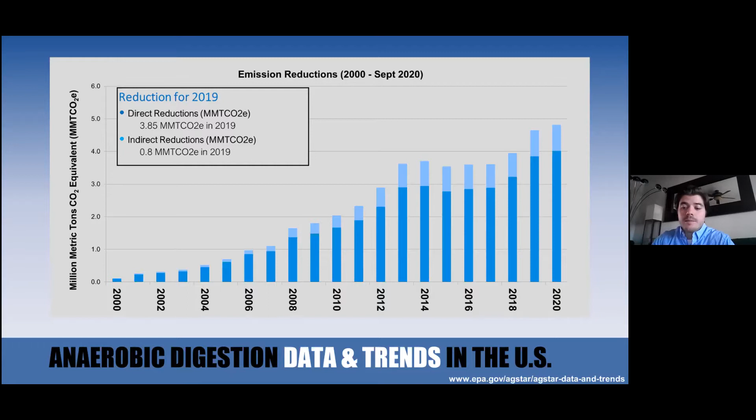What does that mean? Well, the EPA has a really great greenhouse gas equivalency calculator. Just Google that. You can find it and learn about how to equate different gases to what that means in relative terms. So essentially what 4.65 million metric tons of CO2 is equivalent to is over 1 million passenger cars taken off the road per year, as well as over 530,000 homes' energy use for 1 year. So biogas projects are having a big impact and helping to provide clean energy across the economy.

Continuing with the trends in the sector specific to renewable natural gas, there are a number of projects. I would say well over 90% of new biogas projects coming online in the US are renewable natural gas projects. And that's driven largely by the incentives from California and the Renewable Fuel Standard.

And this graphic here shows an example of a renewable natural gas project that's in a business model that is called a cluster project. Essentially, this is an example of California Bioenergy's Kern cluster in Kern County, California. Essentially, cluster projects take advantage of several farms in an area that each will build a digester, or there's a number of ways in which it can work, but in this example, each farm had a digester on their farm, connected through local distribution pipelines to a singular pipeline where the gas was cleaned and upgraded to pipeline quality gas, where it is injected into the natural gas pipeline and is then purchased downstream for use as vehicle fuel.

And this project in particular has 15, I think, maybe even up to 17 or 18 dairies that are participating in this one cluster, taking advantage of economies of scale to reduce the cost per farm of the biogas upgrading and make it more economically viable.

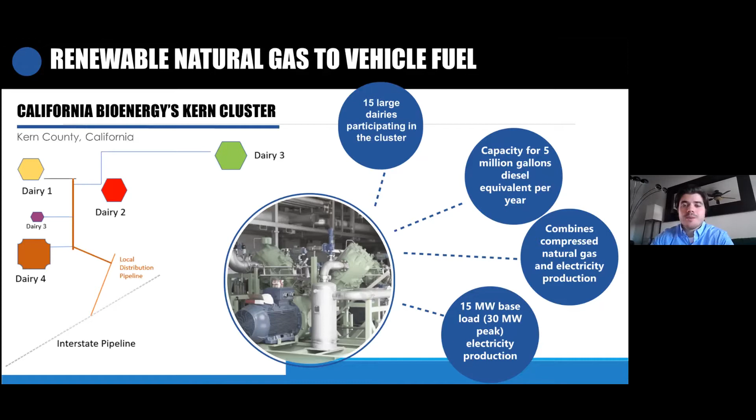This cluster is mainly injecting gas into the pipeline, but also has electricity production at some of the facilities, and is a really great example of what's happening not only in California, but across the country with livestock facilities, multiple coming together to form a cluster to reduce the cost and to increase the number of animals and manure, essentially, that can be used to produce large volumes of renewable natural gas. And Kevin will get into a lot more detail about some of the business models and the nitty-gritty of how those systems work.

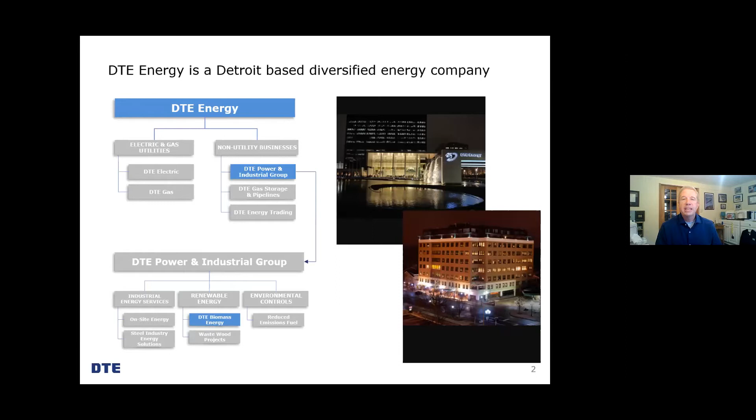But also DTE Energy has a portfolio of non-utility companies, of which its Power and Industrial Group is one of its 3 non-regulated business units. And then within this Power and Industrial Group is the company that I work for, which is DTE Biomass Energy. We are based out of Ann Arbor, Michigan. I'm calling you from my home here in Ann Arbor.

And we've been creating renewable energy from waste biogas sources for over 30 years. We currently operate about 24 biogas projects throughout 7 states. We have about 80 employees across the country, and our investment thesis is to own and operate these projects under sort of long-term investment practices. Our company has primarily and principally been taking biogas generated from the breakdown of trash at landfills across the country and converting it to renewable electricity.

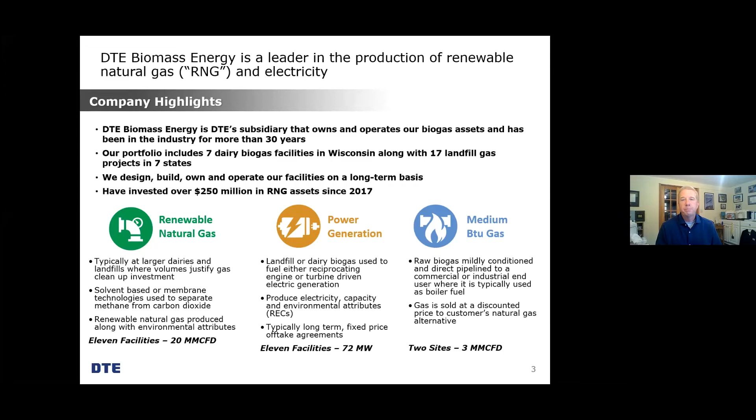However, as Nick pointed out, with the demand for RNG increasing over the past several years, we've expanded outside of landfill gas, and now we're primarily focused on developing projects using the biogas created by cow manure at dairy farms, and we convert that to transportation fuel. As I mentioned, our company has had a lot of experience on the landfill gas side, and we started up actually our first RNG project about 20 years ago at a landfill back in 2002. So currently our project portfolio includes 4 landfill gas-based projects.

And because of our experience on the landfill side, we were able to be one of the first to get into dairy-based RNG back in 2017 when we invested in our first set of dairy biogas to RNG projects in Wisconsin. We followed that up by completing construction on 4 additional facilities also in Wisconsin, bringing our total RNG assets to 11. And we've spent well over $250 million developing this space over the last several years.

We continue to see tremendous growth and opportunity here, especially in the dairy sector. And we have a directive by our senior leaders to continue to grow this business line, which we are doing. Our latest dairy RNG project is going to be in South Dakota, and we are planning to break ground probably within the next month or so.

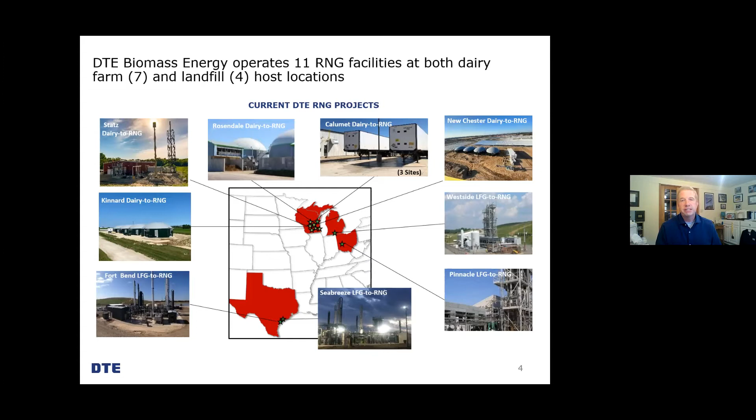So I'm going to go through these next 2 sections fairly quickly, as I want to dedicate most of the time to the benefits and the marketplace and the host farm characteristics surrounding RNG. But I thought maybe some of you might be thinking, well, what's all the attention and what's all this buzz around RNG, and what's creating that? Well, my personal opinion is it's a result of both macro and micro level factors coming into play.

On the macro side, RNG is a critical component of reducing greenhouse gas emissions. Decarbonization continues to gain momentum, and calls for the country to move to net zero emissions by 2050 have grown louder each passing day, and many stakeholders are making commitments to rapidly decarbonize. There are numerous drivers for decarbonization, whether that's advocacy or policy focus from both federal and state governments, as Nick has highlighted. There's commitments from utility companies to decarbonize, and similar commitments from companies as their environmental, social, and governance actions, better known as ESG, which is certainly being followed more and more by investors.

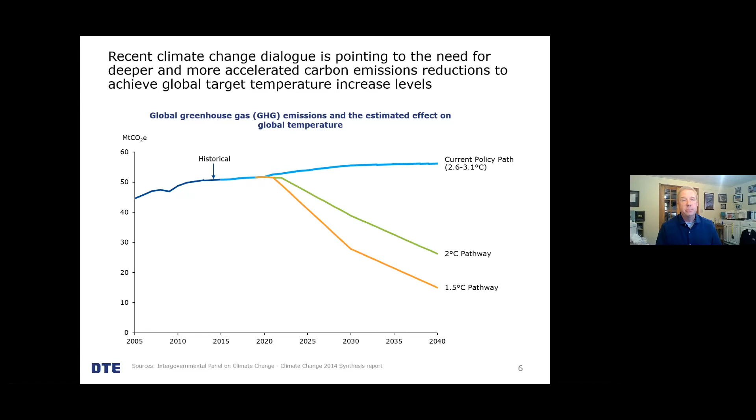And so negative emissions or offsets from these biosequestration projects, such as RNG, are going to play a critical role in achieving this significant decarbonization. So while global attention on fighting climate change has led to an increase in the popularity of RNG, so have more local efforts and attention. More and more dairy farmers are embracing their own role in this fight, and they're proactively looking for ways to improve the efficiency of their operations.

And RNG can turn what's traditionally been a cost to the farm, that being the collection and handling of manure, into a revenue stream. An RNG project not only benefits the farm itself, but also the local community around the farm, and it provides the farm another way to be a good neighbor in their community. And I'll get more into these benefits later in the presentation.

So now I thought I'd spend just a few minutes on the science part of the presentation. That is, how do we actually go about creating the RNG?

And so these next several slides will provide a high-level overview on how RNG is created at dairy farms and some detail into the actual science. And the idea of RNG is quite simple, right? What if we could capture methane that's a result of organic decay, and rather than allowing it to escape into the atmosphere, we can use it instead for a beneficial use.

So you'll see steps number 1 and 2 here in this slide of making RNG is to actually collect the manure at the farm, and then you deposit that into anaerobic vessels where that manure will sit and naturally decay, creating the biogas. Next, step number 3 is to collect this biogas and send it to a facility that refines the biogas, such as converting it into a product that looks just like fossil fuel-based natural gas. Again, now you've got RNG.

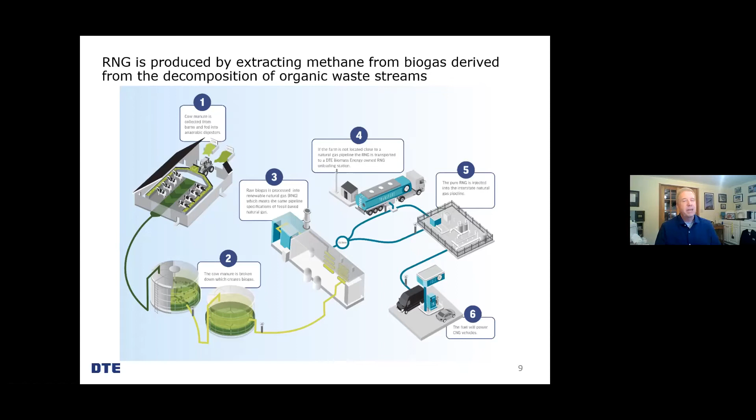I'm probably stating the obvious to this audience, but it goes without saying that manure management is certainly something that dairy farms need to pay a lot of attention to, given its potential impact to the environment, as well as its local community, and then just frankly, the large cost of handling this manure. So the dairy farm industry has been consolidating. Smaller farms and herds are being gobbled up and acquired by larger farms, which has led to farms with thousands and thousands of cows in one location. And these farms now need to address the large volume of manure that is coming in as part of that consolidation.

So traditionally, manure is collected by a farm. It's usually placed in large open lagoons, where it either breaks down and evaporates, or maybe some of it is taken out of the lagoon and land applied as a fertilizer. The collection of manure, however, in an anaerobically sealed container will capture that biogas that's created when that manure naturally decomposes.

And as you can see from this slide, the collection vessels can vary substantially. That top one, the covered lagoon, is just simply taking a tarp, if you will, and covering an existing lagoon. Or what we can do is construct containers that are specifically designed to optimize the collection of that biogas, either above ground or below ground. That middle one is kind of an underground swimming pool, if you will. You can see the top of it here in that photo.

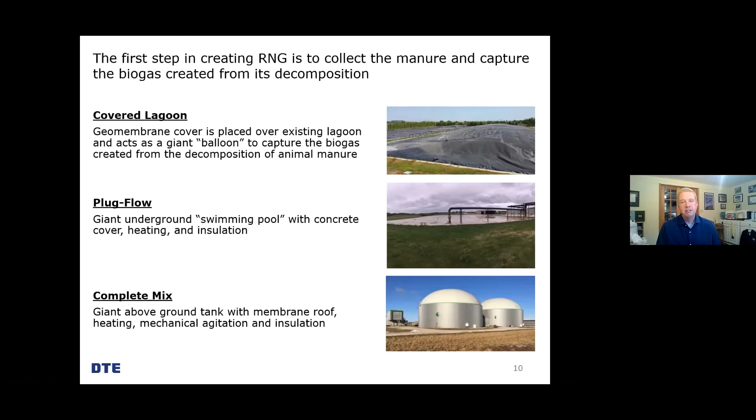Okay, so now that the biogas has been captured, we now need to clean and convert that into pipeline quality renewable natural gas. Raw biogas coming out of a digester is typically around 58% methane, 41% carbon dioxide or CO2, and the remainder being hydrogen sulfide or H2S and some other small volume of gases. And there are several ways that biogas can be processed and refined into RNG.

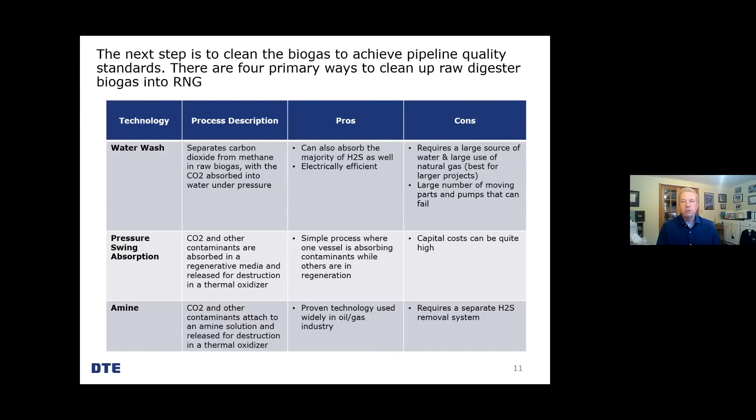I'm not going to delve into a bunch of the details here around each technology, but rather wanted to point out and highlight that there certainly are different ways to do that. They all work to varying degrees of success. They all have their advantages. They all have their disadvantages. And if anyone would want to spend more time talking about that, we can certainly connect individually to do so.

I do, however, want to spend just a minute briefly describing the process that we at DTE have chosen, at least for our initial dairy-based RNG projects, and that's called a membrane technology. So the slide here shows both a cartoon and a cutaway image of a membrane bundle. And the membrane can basically be described as a collection of porous straws. You can see on the bottom right, that's the cutout showing the fiber bundle.

And in a single commercial scale cartridge, that fiber length can be as long as 1,000 miles. And so what happens is the individual components of the biogas have different diffusion rates through the walls of the membrane. So this allows kind of this controlled separation of the biogas. So methane can move through the straw lengthwise to the other end, while the less desirable components such as CO2, carbon dioxide, that gas can permeate and move through the walls of that straw, where then we can collect that gas for destruction.

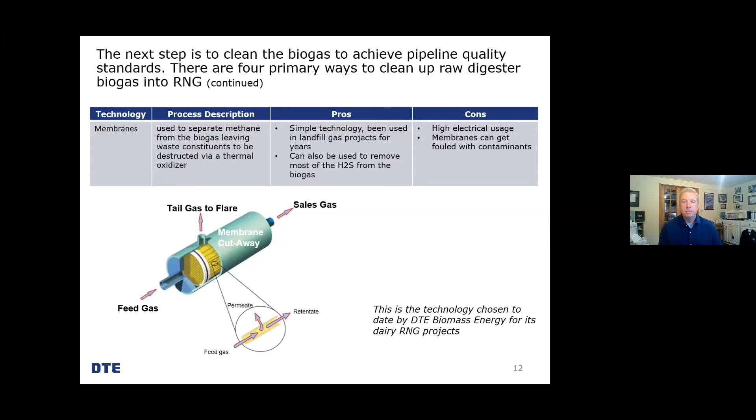This is one of our RNG facilities at a dairy farm in Wisconsin. You can see kind of in the background that long roof. That's one of the cow barns. As you can see, the RNG facility is not some giant, industrial refinery looking behemoth, but rather has a fairly small footprint. The image on the bottom right is of the membrane skid itself. You can see again, that's where that separation of the biogas occurs. And those long tubes, it's probably hard to see here, but the membranes are contained inside those tubes.

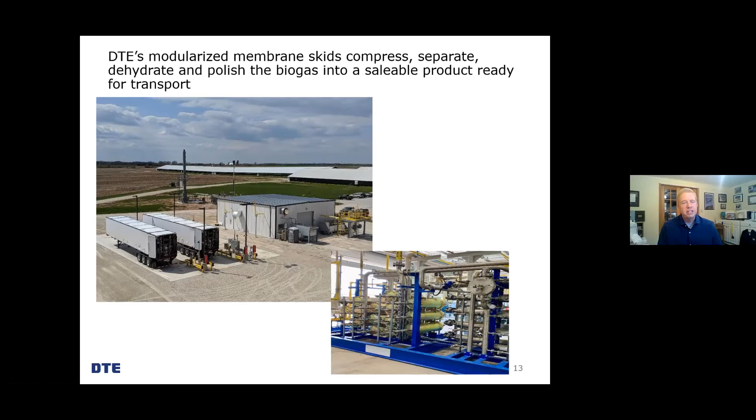Of course, there's some other components that are not shown, some compression equipment and some other auxiliary equipment. But I wanted to give a general sense for the footprint of these types of projects at dairy farms. Okay, so we've created the biogas, we've cleaned it up into a pipeline quality product.

Now we have to get that to the market. Very often these dairies are in very remote areas that aren't near a point where we can conveniently and economically inject into a gas pipeline. So what we've done at several sites there in Wisconsin is employ what's called a virtual pipeline, where we can truck the RNG to one of these centralized injection facilities that we build and operate that is right on top of the gas pipeline. And again, we'll compress and load that into tube trailers and then truck that to this. And those trailers are specifically designed for handling this type of operation.

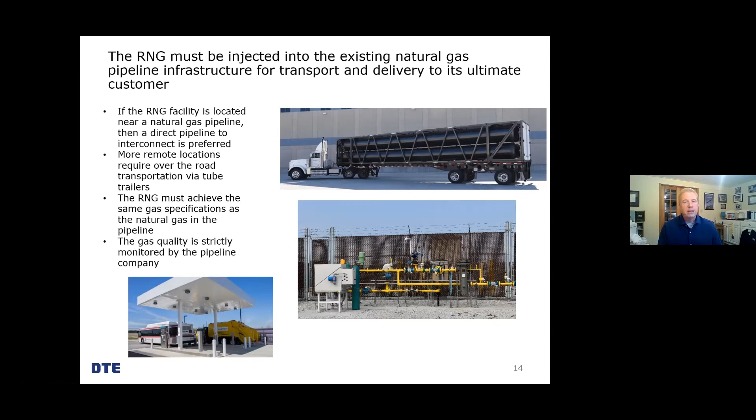But technology and investment in this RNG space certainly continues. And as it's done, smaller size dairy farms are starting to become more economically viable. Modularizing the processing equipment and using different, maybe less costly digester designs are leading the way in this technology investment area.

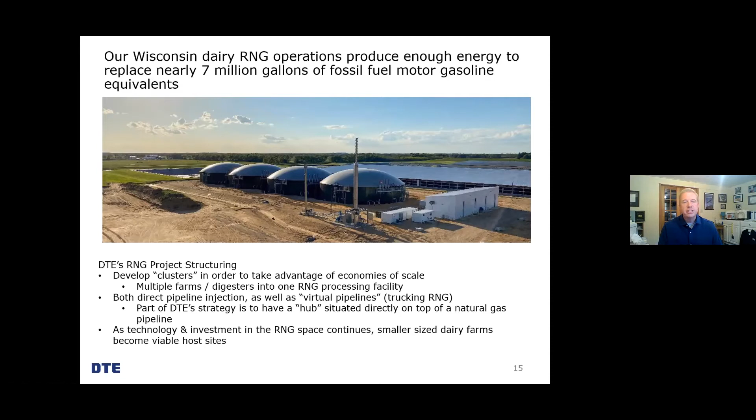Also, as Nick mentioned, developing projects kind of on that hub and spoke or pod basis certainly helps, where you can connect multiple farms via pipelines and digesters into one RNG processing facility, because sometimes a farm is just not big enough to support a standalone RNG project on its own.

Milking cows, along with producing 6 to 8 gallons of milk a day, can produce well over 100 pounds of manure per cow per day. And of course, this volume will certainly vary substantially based on the size and the type of the cow and the location and the feed ingredients. But nonetheless, you're dealing with a lot of manure from cows. And with a digester, that manure can be directed through the digester where the biogas is created. As that manure decomposes, we can take that gas and put it to a beneficial use, such as RNG. The manure that comes out of the digester is now referred to as digestate.

And some farms can use this digestate as bedding for the cows. They can put it through some presses and actually use that as dry bedding and return that bedding to the barns. Or this digestate can also be land applied to crops. And because it's got reduced pathogens, as a result of that anaerobic process in the digester, this digestate can be applied over a longer period of time than, let's just say, the raw manure itself.

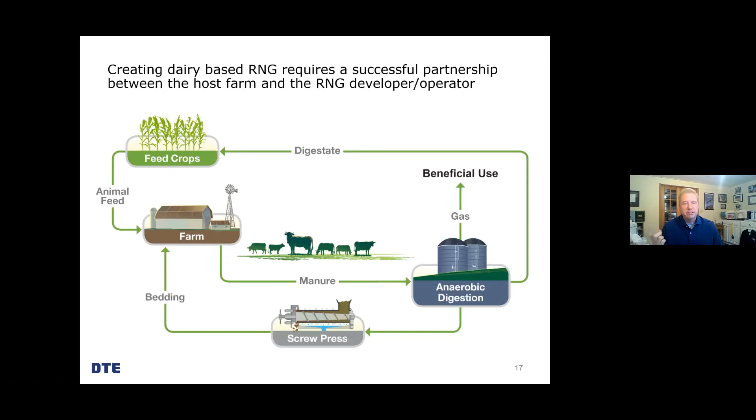So now there's certainly some environmental benefits for the owner as well as the local community, and I want to kind of just point those out here as well. Remember that biogas created from that manure is approximately 58% methane and 41% carbon dioxide. And methane, as Nick pointed out, is a very, very potent greenhouse gas, at least 25 times more potent than CO2. However, both gases are a very large, powerful pollutant.

So a digester collects that biogas, that harmful greenhouse gas that otherwise would have just been naturally released into the atmosphere as raw manure is either sitting in an open lagoon or sitting on land as a fertilizer. We're going to capture that and then put that to a beneficial use. So certainly environmental benefits there.

Also, that manure coming out of the digester, now referred to as digestate, certainly doesn't smell as bad, as some of the volatile solids have been destroyed. So that's really good for community relations and for being a good neighbor.

Without a digester, that farm that collects that manure can land apply it for fertilizer. However, large quantities of manure require a large amount of acreage and can have some seasonal limitations depending on where you're at. Whereas digestate could be land applied later into the year and could require less land, again, based on the permitting requirements of where that farm sits. The reduced pathogens can also significantly improve the water quality, as this digestate is not raw manure.

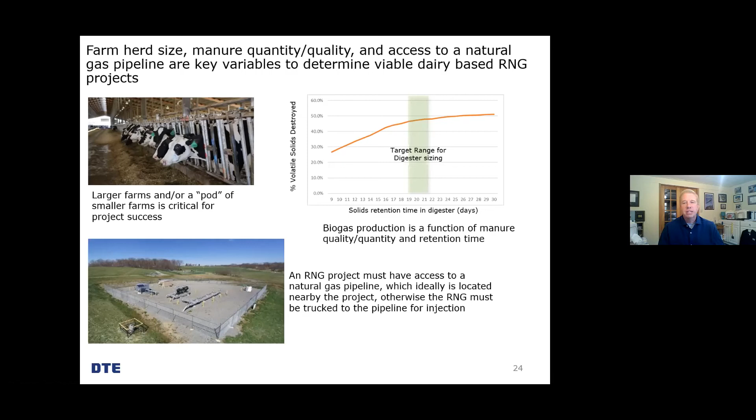And finally, as I mentioned before, another critical factor is the location of the farm. Ideally, it's located really close to a pipeline so we can do a direct pipeline. If not, then we're going to need to truck that gas, and that can add some cost and complexity to the project.